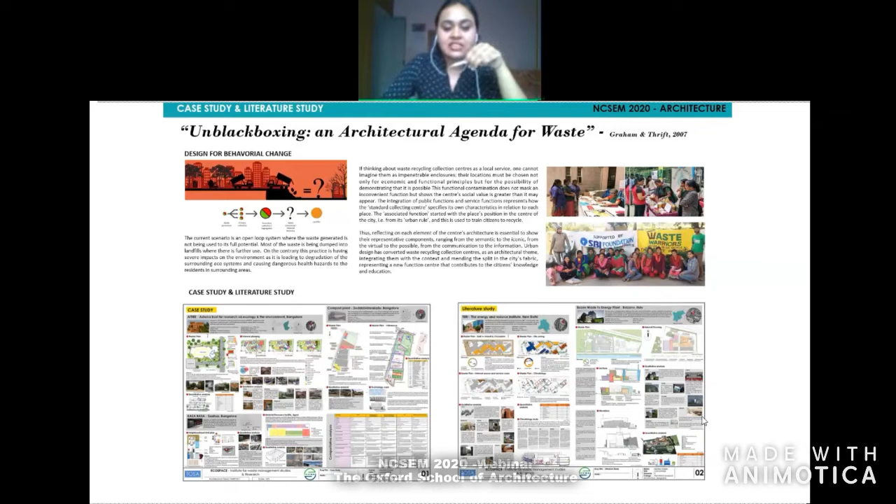So here we do not look at waste as the end product, but we look at it as a resource for something new. And these are the two case studies that I've done: one is a literature study, and one is a case study. Then we go on to the process of site selection.

For the process of site selection, I started with the whole of India and studied the major metropolitan cities. After this, I came to the conclusion that the top 5 metropolitan cities, that's Delhi, Mumbai, Calcutta, Bangalore, and Hyderabad, are the highest producers of waste.

Among these, Kolkata, Delhi, and Mumbai are the highest, the top 3. Then comes Bangalore and Hyderabad. Now, the top 3, because the amount of waste generated is so tremendously huge, already have some measures taken to handle this huge amount of waste, either waste-to-energy plants or large scale recycling units.

But when it comes to Bangalore and Hyderabad, not much has been done. And when we talk only of Bangalore and Hyderabad, Bangalore comes first because the amount of waste generated is comparatively more compared to Hyderabad. That's why I've selected Bangalore, because I think there's an immediate need for one such project.

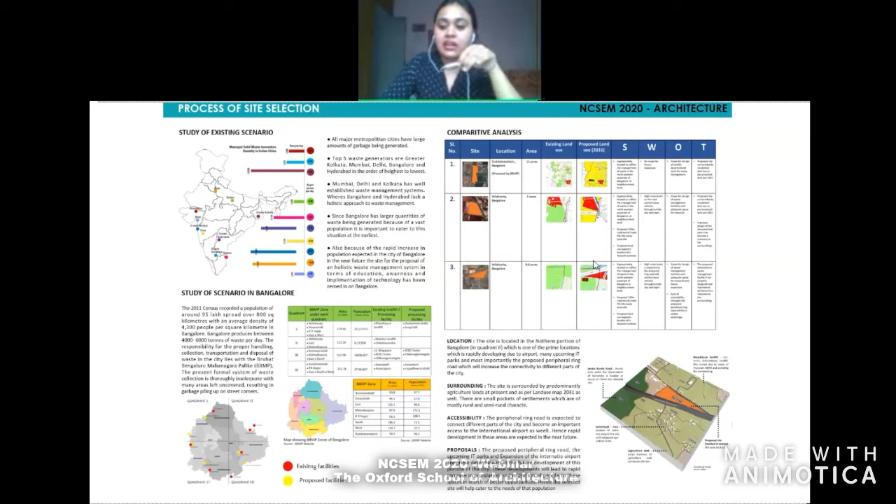And the surroundings, as I already said, are not entirely residential. It is mainly agriculture or public utility, with the peripheral road coming into picture. So the site was selected because of these reasons.

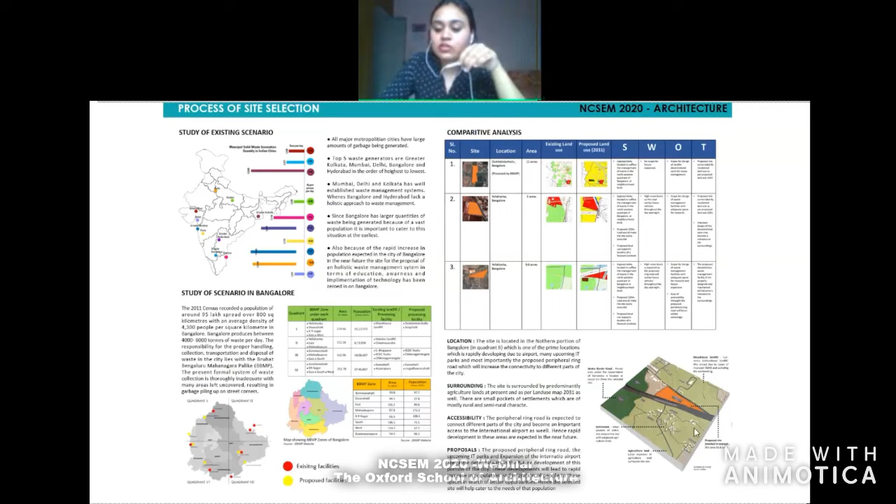You see a small model in the corner. The one in orange is the site. The light green portions are the agricultural lands, and the dark green is the forest land. You see small pockets of settlements around, because this area is not entirely developed as of now. But with the peripheral road coming into picture, a huge population will move into these areas.

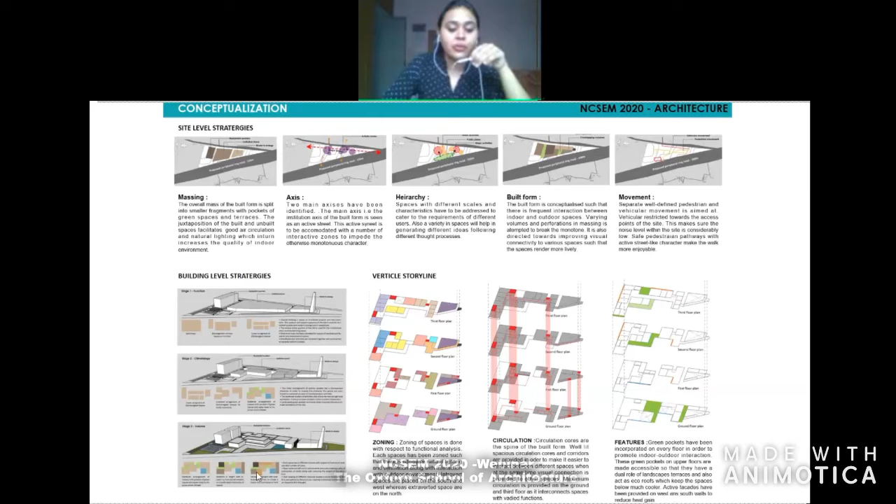Once a scattered arrangement has been done at the ground level, then comes the volume. Different volumes have been given to each space depending on its functionality. As an end product, we get this amalgamation of different volumes with small pockets at different levels. That has been the reason for the form generation.

Then comes the vertical storyline. The first one is zoning. Under zoning, all the spaces which are extroverted, which have more interaction with the outside, are majorly located on the northern and eastern portion. The southern and western portion has a lot of introverted spaces like labs or circulation spaces and circulation cores, because very less amount of time is spent in these spaces, as they are generally warmer compared to the northern side. So these circulation spaces have been given on the southern side.

The second one you see here is the circulation cores, the vertical circulation cores. The last one is the different features: the green pocket, the interactive facades, that is kinetic facade, and the blue ones are the glazing.

All the blue lines that you see here are generally to the northern side, to bring in the north light because it's not very harsh. All the southern and western facades have been given kinetic facades to alter the amount of sunlight that's coming in throughout the day.

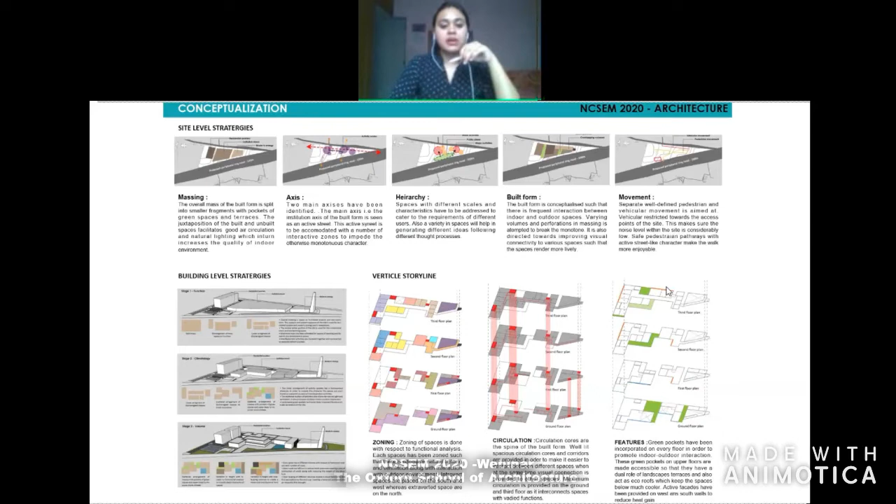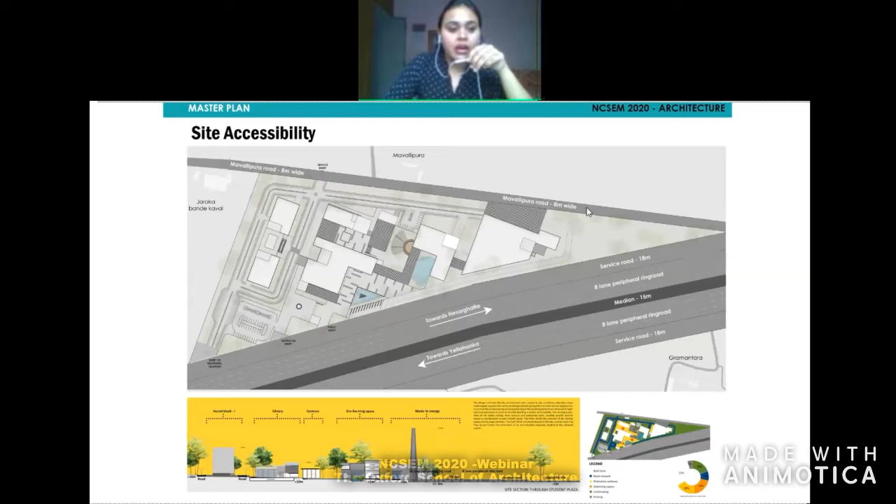And this is the master plan. This is entirely 11.6 acres of land, and this is the main access road, the main peripheral ring road, which is an 8-lane peripheral ring road. We have two roads: this main peripheral ring road, and another secondary road going behind, the Mavallipura main road. Then, coming to the access points, we have 3 main access points along the peripheral ring road.

The first two that you see here are the public entry and the institution entry, located with separate entrances for pedestrian movement and separate entrances for vehicular movement. This access point is for the residential entry that goes to the hostel blocks, separated from the main institution block so you can manage the crowd coming into these spaces. Then there's a service entry to the back portion of the site in the rear, mainly for vehicles coming in such as the waste tipping vehicles, and also for the service entry of the canteen and the auditorium.

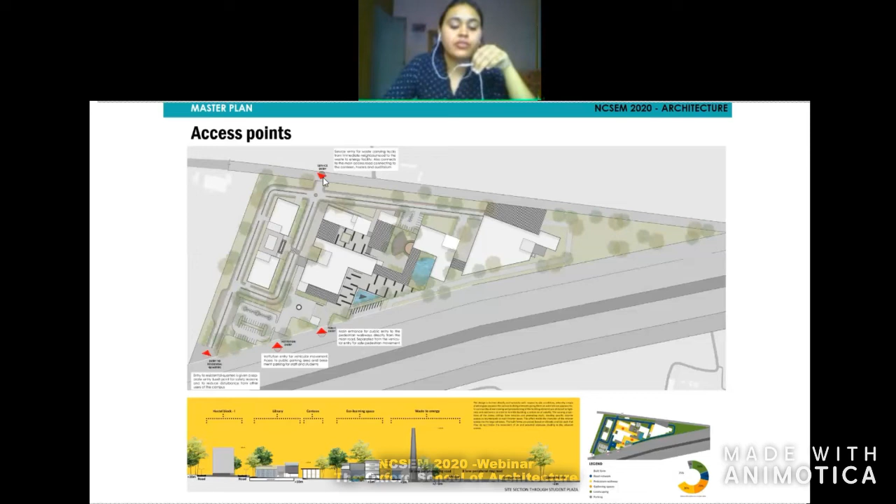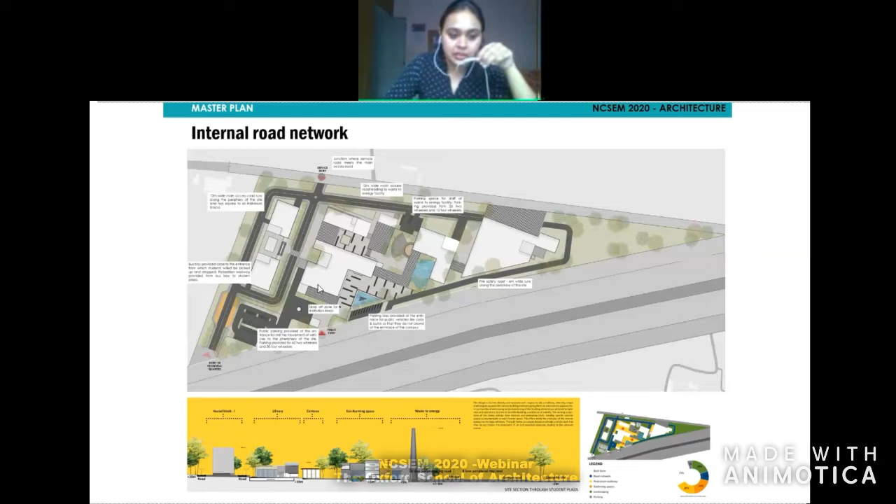Then comes the pedestrian movement. There is a continuous spine all the way from the entrance to all the blocks. All of these pedestrian movement plazas are given mostly to the northern side, so that the shadows from the buildings on the southern side of these pathways are cast onto them, keeping them mostly shaded throughout the day. This portion in the beginning is the public plaza, public walkthrough, and in between the 2 buildings is the student plaza.

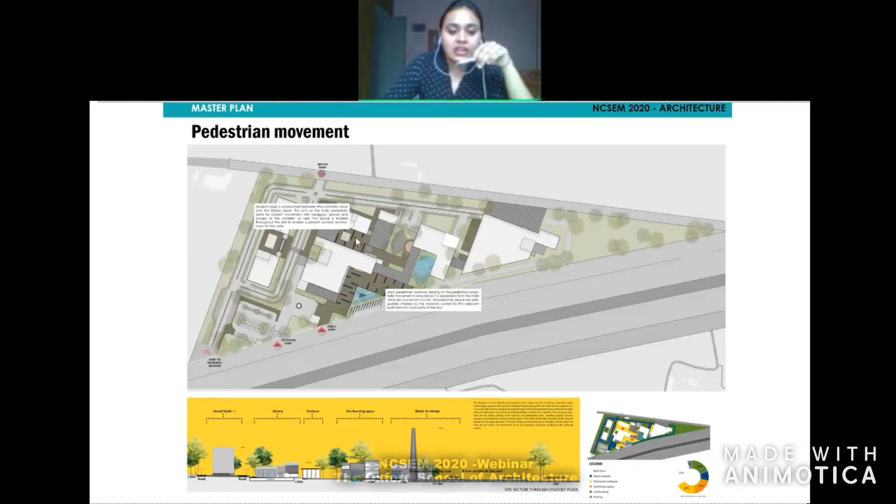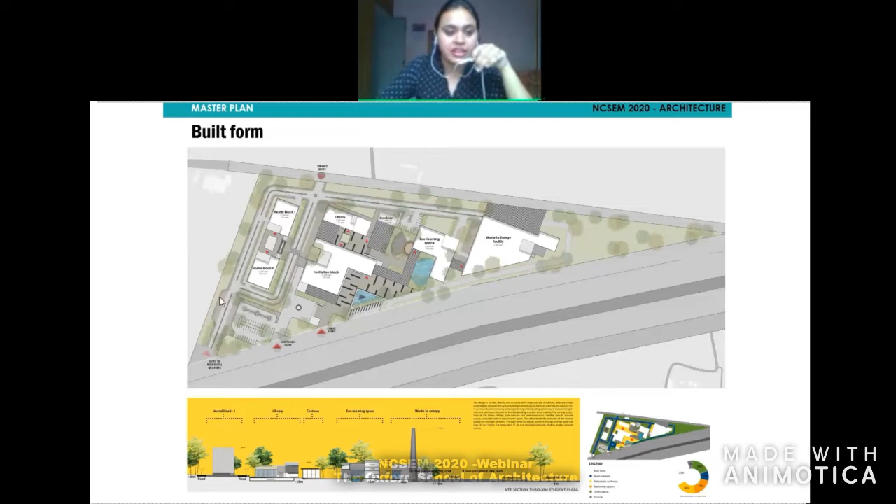Coming to the built form, I have 6 main built forms: the institution block that you see here, the library block, the canteen, the eco-learning space, the waste-to-energy facility to the western portion of the site, and the residential quarters, that is the hostel blocks, on the eastern portion of the site. This is the landscape layer, which I will speak of in the next slide.

So these are the sub-layers of the master plan. I've detailed out the circulation layer and the landscape layer, and these are different sections along different roads. The first section you see here is the main road, the main driveway marked in gray. Then comes the cycling track, marked in red, then the footpath, and then space for vegetation. So this is the section through the main road.

The second one is the section through the bus bays, showing the bus bays on either side. Then it's the section through the pedestrian walkway, and the fourth one is the section through the parking lot. So this is the section through the parking lot, and this is the material palette.

All the color codes given in this section, the material it represents, the reasons why it has been used, and the specification are shown. Mostly all the materials used are either naturally available materials or recycled materials, like plastic tiles and plastic pavers for the cycling tracks and footpaths.

Then coming to the landscape layer, we have the OAT. This OAT has been designed so that stone available on site has been used, making use of whatever resources are available on site. This OAT is located over here, as you can see in the key plan, and it's oriented in the north-south direction to reduce the amount of glare.

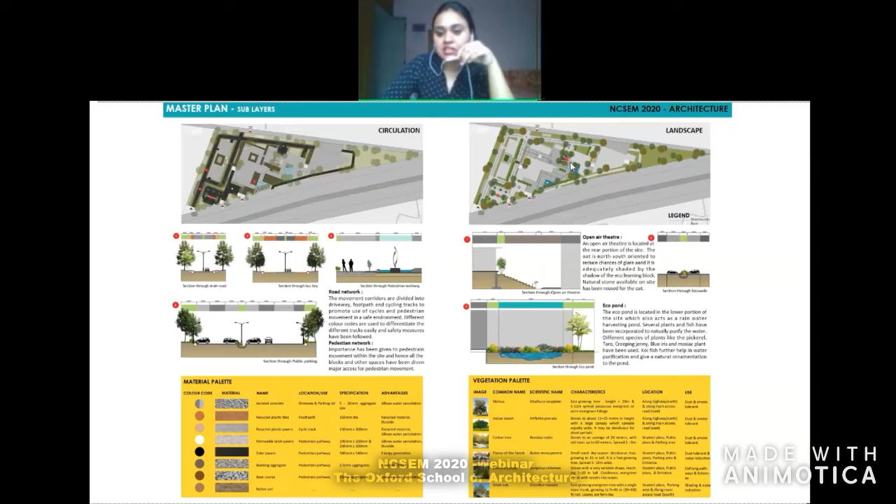Then comes the eco pond, located over here, marked number 3. This is the ground floor plan. Here we basically have the institution block, the main entrance, the reception and waiting area, and this entire portion is the admin area and the main circulation core. This is the library block, the canteen, and the eco-learning space.

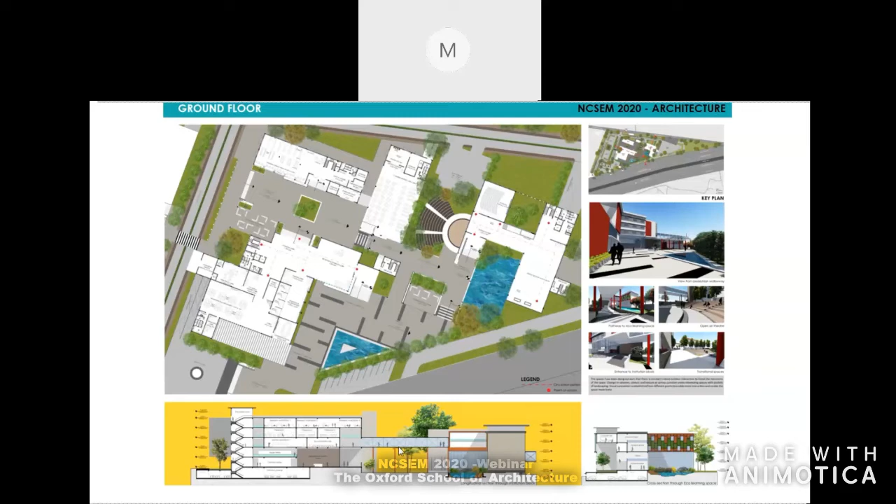Through this section, which is cut across the circulation core, you can see the different volumes and the connecting bridge between the two blocks, which is on the second floor level.

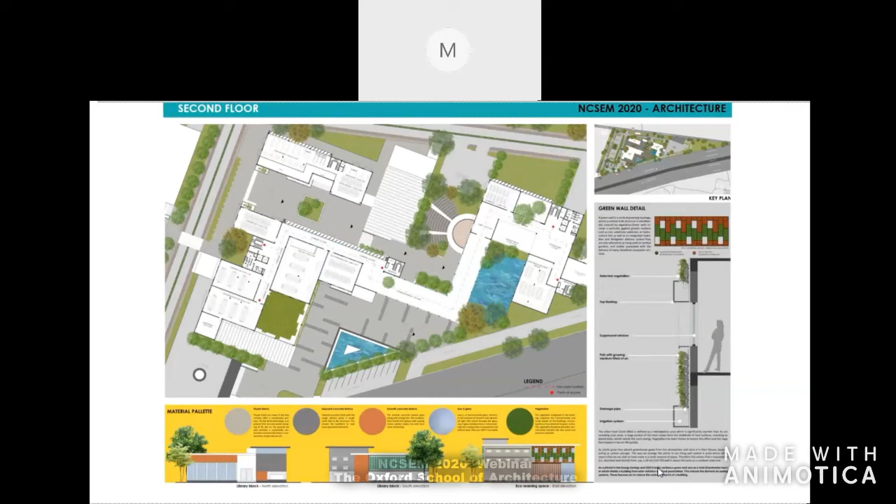This is the second floor. Here you see different labs and the connection between the two blocks through the bridge. I'm also talking about this green wall over here that you see in this elevation.

Hello. Hello. Yes, Monica, continue. Okay.

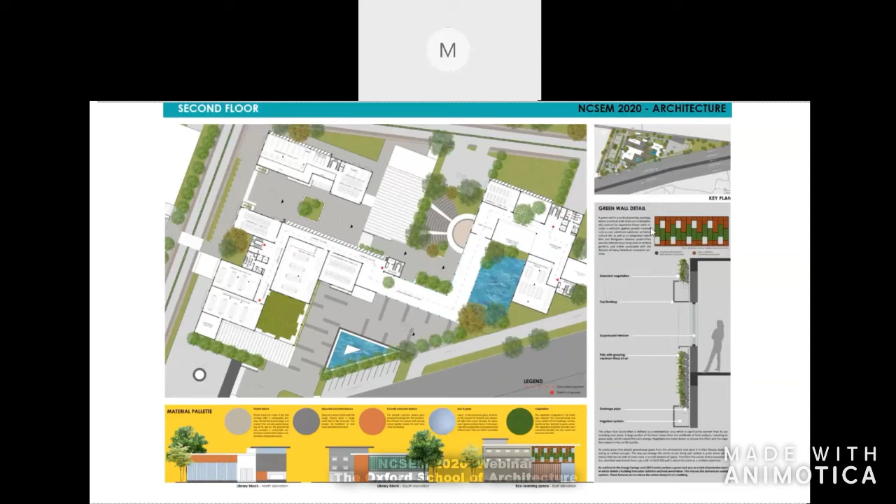So this green wall detail, here you see two different kinds of vegetation used, the green portion and the red portion. This is mainly the bird's nest fern and the philodendrons that are used, because these are very efficient at absorbing carbon dioxide. In the LEED book, there is one separate section given to this portion, because these walls are very efficient in acting as carbon sponges and also as noise absorbers.

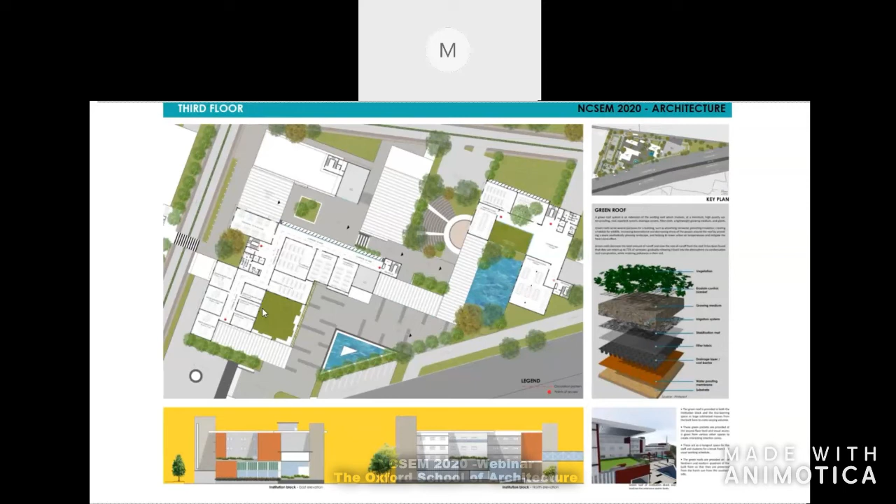Coming to the third floor, here we have all the scientist cabins and some classrooms, and here you see this green terrace, accessible from the second floor. This is the detail of the green roof that you see, and these are generally provided as hangout spaces at different levels.

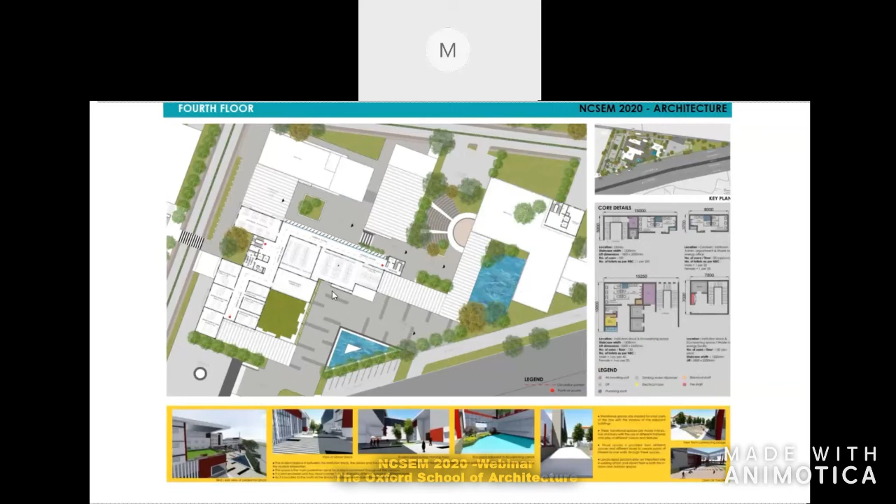This is the fourth floor, which is the same as the first floor. And this is the basement floor.

Here, I'd like to talk about the auditorium. This auditorium has been slightly submerged from the main ground level, about 2 meters low. The reason for doing this is because after a certain point, the temperature of the earth is nearly constant. So when this portion of the building is submerged below the ground surface, the internal temperature is nearly the same, and the load on cooling is considerably reduced.

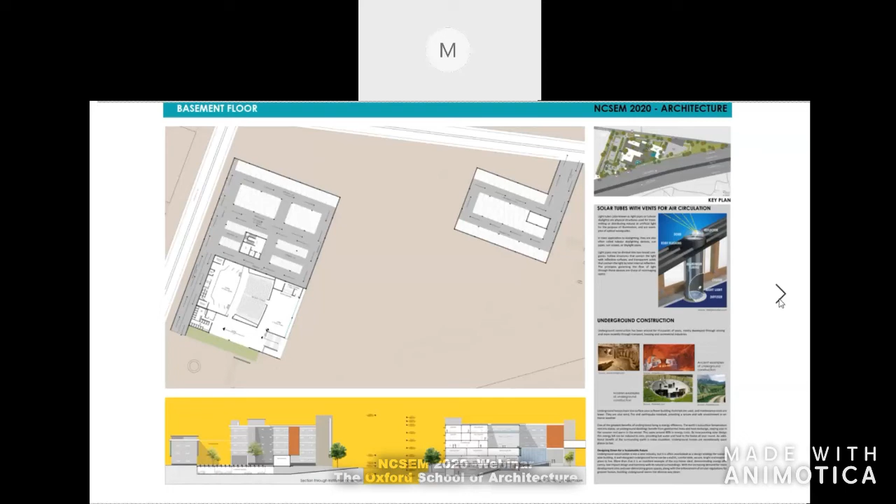So these are the different forms of energy that is generated through solar pavers, algae panels, solar panels, and rainwater harvesting.

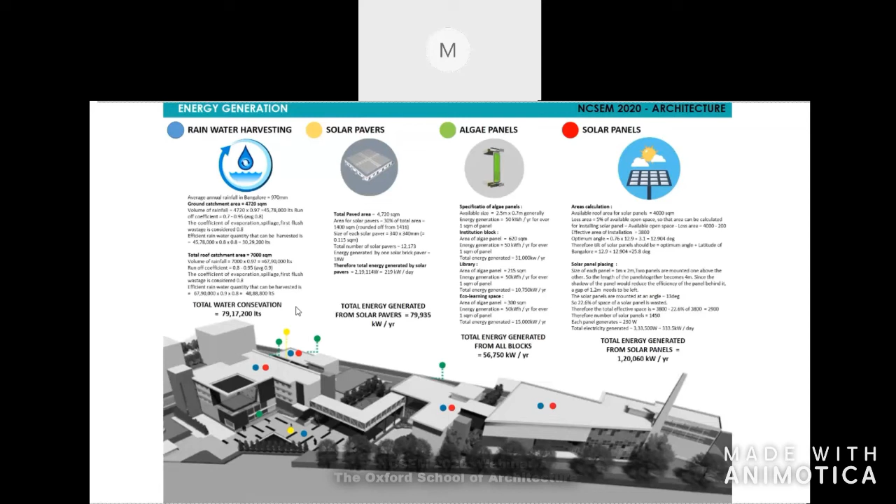The amount of water that is harvested is nearly equivalent to 80 lakh liters.

So then coming to the waste to energy facility, we are talking about the decentralized module, as I already spoke about in the introduction.

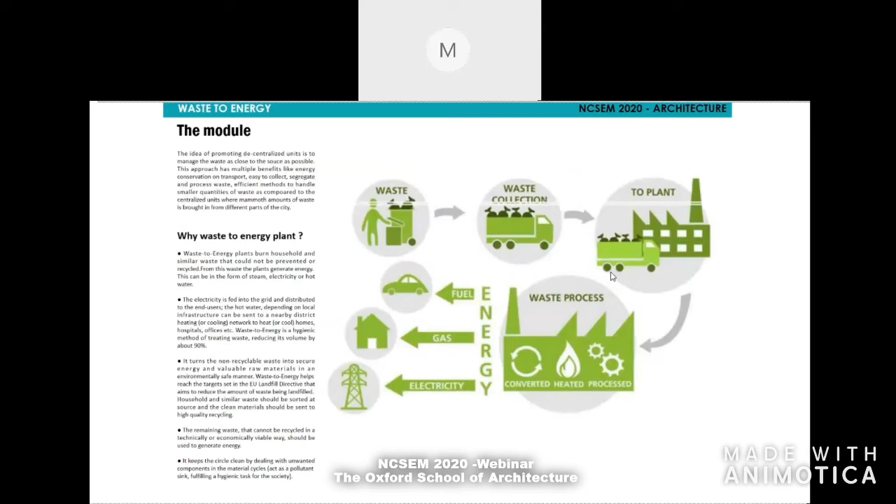This starts by segregating our waste so that each type is treated as per how it can be best used. This is the module of why waste to energy, because energy can be generated through waste in different forms like heat and electricity.

So these are some plans showing the waste to energy module. At the ground floor level is where the waste is brought in, with some tipping areas for recyclable and non-recyclable waste, along with office spaces and a cafeteria for the staff.

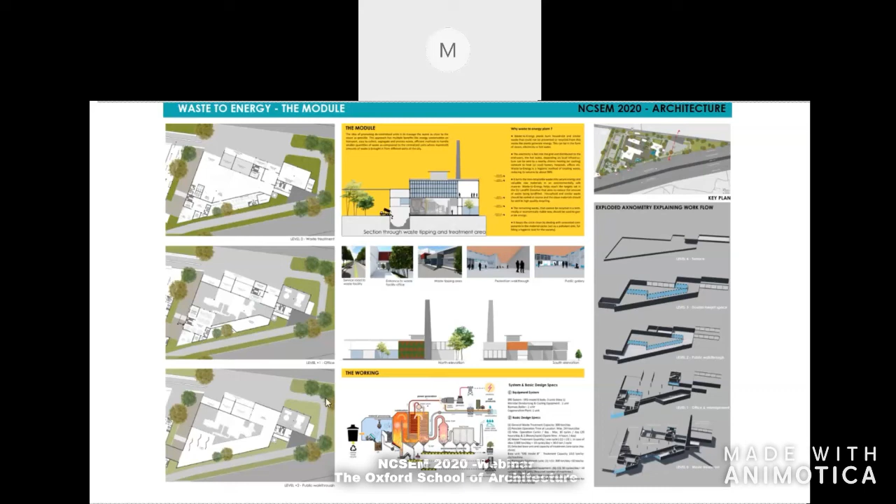And then on the first floor, there are again office spaces. The second floor is basically for the public walkthrough connected from the eco-learning space, so people can come and see what is happening.

As a concluding note, considering the present context and the coming future, the need to consider waste as a resource is of great importance. Our vision as a community should be directed towards sustainable environmental practices where there is sensible use of resources, minimization of waste produced, and energy generation.

In order to achieve such goals, the education, awareness, and research aspect of such an important project has to be made more concrete and accessible. Hence, the role of the designer in this project is to promote an amalgamation of all these aspects so that the campus stands as an example for what it speaks. Thank you.

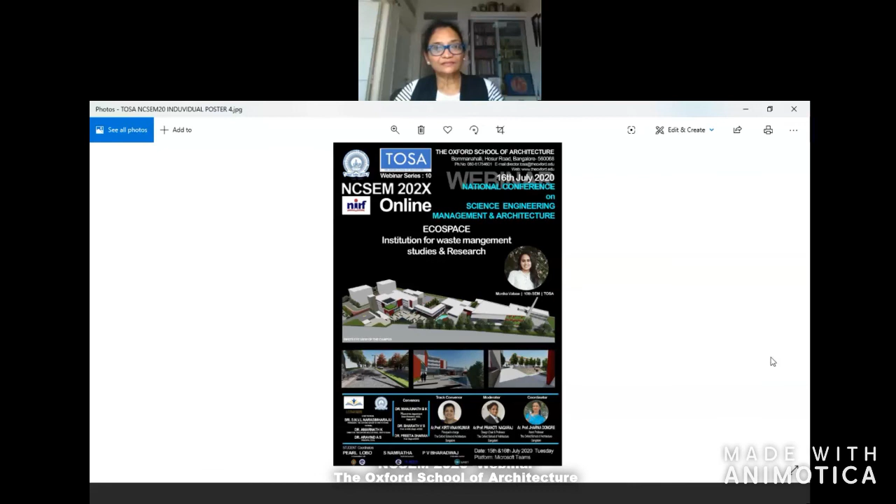That was indeed a very good presentation, Monica. Thank you so much. Now, can you please share your experiences on NCSEM? How did you find it as a good way to explore and present your work here?

Firstly, I'd like to thank the management and the faculties for arranging such a platform in these testing times. It's really hard to conduct one such event on an online platform, so thank you all for putting in so much effort. This has been a great platform because I've got a huger audience to share my work with. All these days it used to be a small circle of only our architecture batchmates, but now with a lot more people, this has been a very interactive session and very helpful for me to upgrade my skills and knowledge. Thank you all.

Thank you, Monica. That was indeed a very well thought and very well worked out presentation. I can see a lot of hard work and effort which has gone into it. So thank you once again and keep it up.